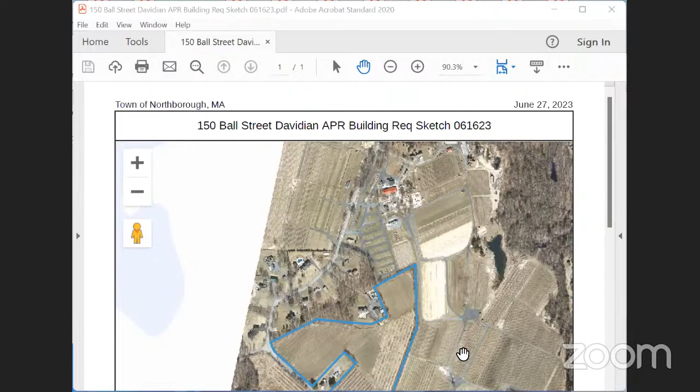Okay, there's a, Vinny's put up an aerial shot. Okay, so here we go. This is 150. How far down do I go? This is Ball Street coming in the corner, and it goes up to their operations here where they have a greenhouse located in this area. This picture was taken before the greenhouse was installed. But this is their operation there, and they're proposing to put it in the red square area, approximately the appropriate size, being 60 by 100.

And there's no wetlands. There's a little wetland down here, but the scale is 500 feet to the inch, so they're more than 500 feet away from any wetlands. And there's a stream down here, but it's not an issue at all. The property within the APR is highlighted in blue, or one of the Michael properties.

Davidian's raised his hand, I'm sorry, Vinny, Michael Davidian's raised his hand. I'm bringing Michael into the meeting also. Okay, sorry, go ahead. Yeah, so that's basically it. The blue area is one of the parcels. There's APR on the property to the south as well, but this is the one they're talking about, referenced in this request to build the packing facility there. So it's a building associated with an agricultural use, so it's allowed on an APR, agricultural preservation restriction. The commission holds the restriction, so they need permission from us before Department of Food and Ag will authorize the grant or a loan, whatever it might be.

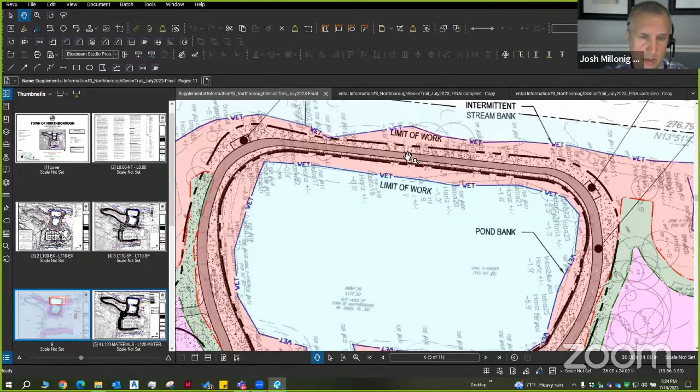I think that was a comment from the commission there. So we've reduced that down to 2 feet. And then also towards the left of this plan, Jeanette, where our stone dust pathway T intersections into the pavement path, we've pulled that out. It was creeping into the 35 foot buffer area. That was a comment that we addressed that came through the commission. So we were able to slide that south, we'll call it, and pull the path portion of that out of the buffer zone. So we're just into the wetland buffer zone there with a little bit of regrading and some revegetation that's kind of spilling into the 35 foot.

We've updated our plans here. We understood that there was some kind of confusion, they were a little hard to read with the various buffer zones here. So we just simplified it. We have kind of the red area that's from the wetland flag, that's your 25 foot no-build buffer. The green is your 35 foot buffer zone. And then the 100 foot wetland zone is all the magenta there. So hopefully this helps kind of clear up and helps to really visualize where we're doing a lot of our work there.

Another comment we addressed from the June meeting was to put slope indicators on our grading plan to indicate where we're pitching the water on the walking surfaces away from the resource areas. We have a couple slope indicators showing we're pitching those away at 1.5%. So any stormwater that falls onto the paved areas and pathway areas will be directed away from the wetland into the vegetation areas along either side and the shoulders, allowed to infiltrate naturally into the soils there.

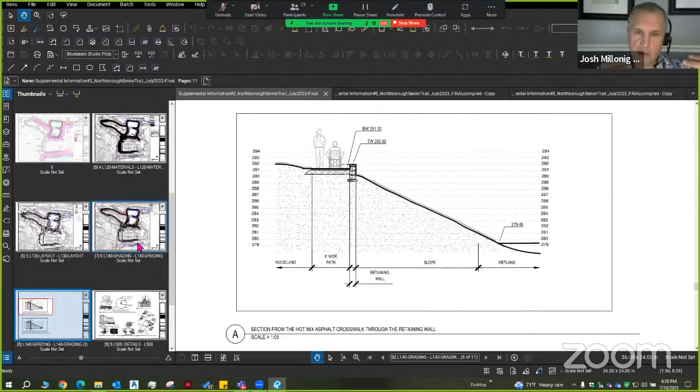We looked at this in more depth and cut a couple sections through there just to verify that our walls are the minimum amount needed to really minimize the amount of disturbance in this particular area. We looked at potentially pulling the wall and the walkway back towards the parking lot area, but we felt that doing so would start to clip out some of the existing natural forest there, which we feel is a good buffer between the parking lot areas and the wetland slopes, helping screen parking lot cars and any lights from spilling into the wetland resource areas. So for those reasons, we felt the current layout, wall heights, and slopes provide the most accessible pathway down while minimizing to the maximum extent possible the disturbance to the resource areas.

We can walk you through more of those questions. We did get another set of comments from Vinny about mid-afternoon last Thursday. Vinny, we've addressed those comments line by line and I sent you some documents late this afternoon. It sounds like you might have just received them or maybe haven't, but we're happy to walk through those if that would be preferred.

Yeah, no, like I said, I hadn't had a chance to review it, but I think your summary was very good. I think it made a good description of where we stand.

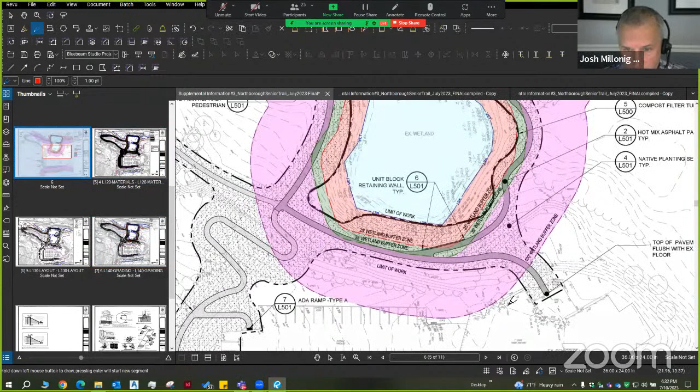How much encroachment are you doing right now in that area, inside the 25? We are regrading pretty close, about a foot or so away from the wetland flag line. We're meeting and matching the grades just outside, about a foot above where the wetland flag line is.

That's the area highlighted right now in the rectangle. Yes, you can see our limit of work line just kind of kisses just outside of the wet line, the WET line that's in blue. So that's our limit of work, that's our limit of grading. I don't know, Jeanette, if it makes sense to flip back to the grading plan just to show the extents. We're meeting and matching that. I'm not exactly sure what contour line it is, but that one that's right outside of the wet line.

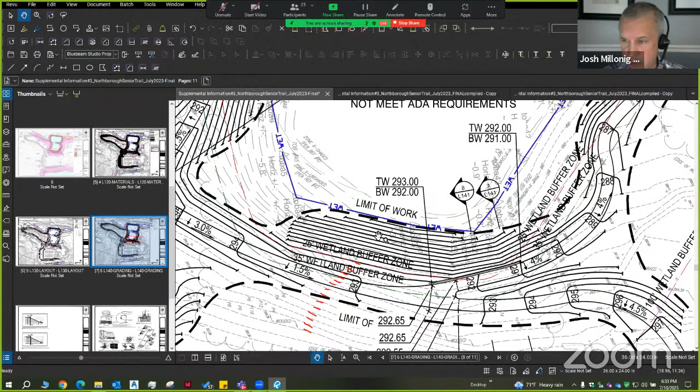So that's where we're meeting and matching existing grades. We're staying completely out of the wetland flag resource area. We're not proposing to do any work within there. All of our erosion sedimentation control is going to be outside of the flag line. We are doing this compost filter tube, which will remain in place in perpetuity. It's a seeded erosion control wattle, so that'll stay forever and provide some additional sedimentation mitigation ongoing, and also provide more planting to help.

Okay. Just a question, Vinny and folks from Weston Sampson - you're looking for a number of waivers, correct, from the bylaws? Do we have a listing of the waivers you're looking for and your mitigation plan for each one? That'd be a lot easier to figure out here.

Yeah, we do have the list of waivers. That was one of the comments, Vinny, that we were just buttoning up late this afternoon. That was part of the reason for our delay getting responses out to you, but we do have that list of waivers. It is in the latest response that we sent back to you this afternoon. It's an attachment - attachment C. If you wanted to scroll down to that, we provided more information, Vinny, that you requested that details a bit more reasons for support of this request and some more information. So this supplements the previous list that we included in the supplemental response number 1, I believe.

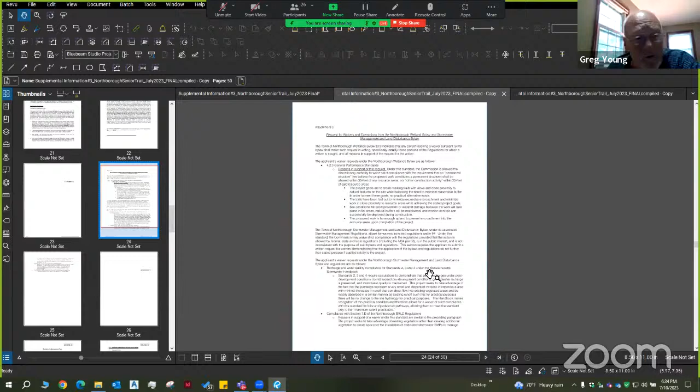How many waivers are you looking at for exceptions to, or are you looking for? Quite a few, I don't know if I've counted all of them. You're talking like 20, 15, 26, whatever. I would say more in the realm of 5, 10, 15 waivers. We have waivers for both the stormwater and land disturbance permit as well as your Northborough wetlands bylaw. So we have a list of waivers for both of those.

My 2 cents only, and I would ask for the commission's comments after I make my comments, and that is that receiving 15 waivers an hour and a half before the meeting is not really the way to do business, in my view. We need time to digest them, discuss them, and hopefully come to these meetings and work through it, not have this be a working session for 2 hours. My 2 cents says that we let Vinny go through that listing, work any gaps with you, so that when we talk about this, it can be a streamlined process as opposed to a long working session. Now, if the commission feels otherwise, fine, but I'd be interested in hearing comments.

I agree with you 100%, Greg. This seems - yeah, we haven't even had a chance to look at this, so.

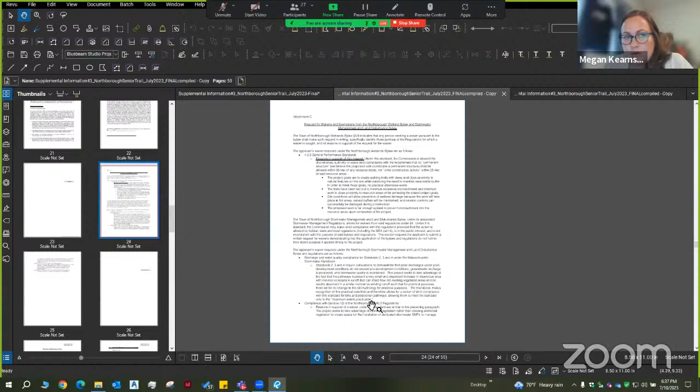Just want to make a note of that. Any other commissioner have comments on this? Do you want to move forward as it is, or do you want to look for a different approach?

I just have one question, Greg. On one of your plans, it showed a section of trail that was not ADA accessible. So I guess I'm curious, my understanding was to create an ADA accessible loop around the pond, but there's a section that's not.

Through the chair, the loop around the pond, correct me if I'm wrong Josh, is ADA accessible. The loop that goes up the hill toward the cell tower is not ADA accessible, there's no way that would be, that's far too steep. But the intent and goal was to have ADA accessibility around the pond and around the parking lot. So while we were talking about the single switchback that goes from the senior center rear patio and does a 180, if you look to the left of that, there's a substantial switchback there that maintains ADA accessibility. It's not what your plan says.

I'm sorry, Dan? It's not what the plan says. If you zoom in, you saw a section of trail that says this does not meet ADA requirements. That's the section that's highlighted right there. That is an 8%.

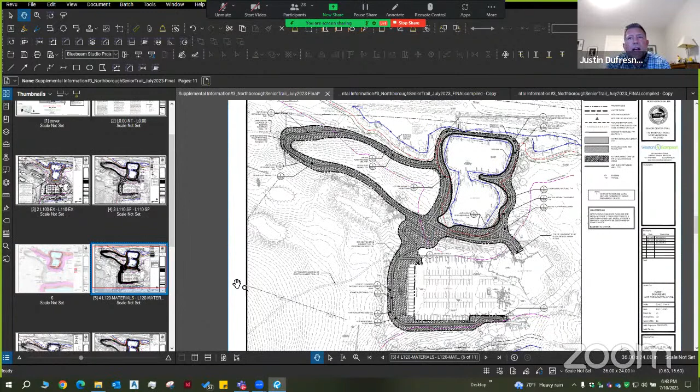Yeah, and I think my thought on that, I know it's kind of a small section. What was it, Josh? 7.5%. So that's kind of your typical handicap ramp accessible. It could be accessible if that had handrails and some kind of level landing areas, but I don't think we need that out here. At 7.5%, at least to me, we work on roads in Worcester and other things that are 16% and things, and people still navigate those.

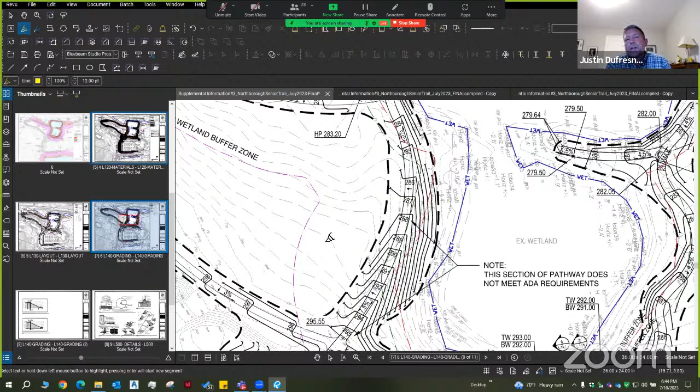I feel like having the hard surface there would be good for somebody pushing a baby stroller or something like that. They could still easily navigate that section. So to me, it kind of still feeds into the thought of this overall project. And if somebody really needs that flatter slope, they've got that longer walk they can get through. So in my eyes, I'm okay with it, and I kind of understand from an engineering standpoint, at least trying to get that in there to complete the loop around there.

Is there going to be signage that calls that out before you get to that spot? Yes, we have wayfinding signage around all the trail intersections, just to indicate what direction they're going, so that there's no confusion. There's going to be a lot of vegetation remaining, so when you're at that intersection, you may not be sure whether you take a right or go straight.

Okay, and then my other question, where we are doing work within the 25-foot, what's the existing vegetation there today? Is there any invasives or any of that taken out of there to revegetate that area, or is it just mostly some wetland vegetation that's kind of going back to what it was, or probably mostly upland vegetation? But is there anything invasive that we're getting out of there that kind of has a benefit?

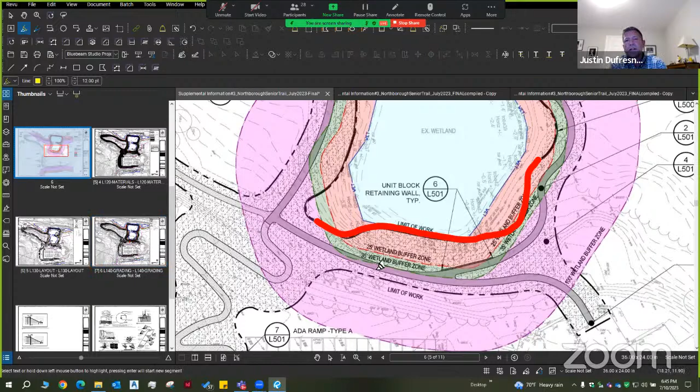So I don't recall there being very much invasive species out there. It was mostly nice wetland vegetation. It's a really beautiful wetland, so it'll be nice to be able to have the public go and walk around it and see some fish. I think I saw fish when I was out there last, so it's a really beautiful spot. I don't recall seeing any invasive species while I was out there.

So, which I think Megan, what are we doing with that slope for revegetation? Is it just getting a mix, or are we planting or plugging any plants along that new slope, or is it just we're going to armor it with some type of erosion control mat or something like that, and then it just getting some mix? Yep, I believe we're... correct. Yep, sorry, go ahead, Josh.

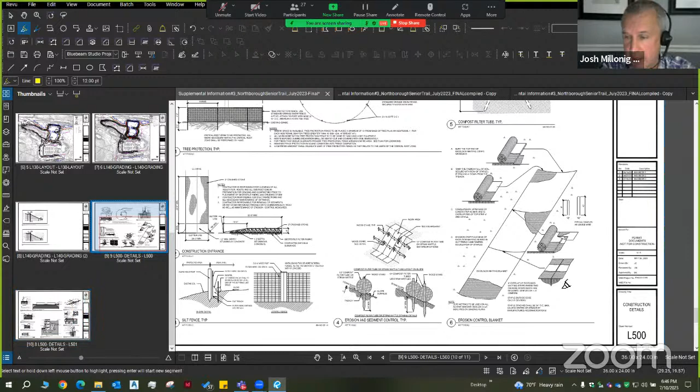Yeah, I was just going to say, our standard detail is slopes greater than 4:1 will get a jute mesh matting and erosion control blanket of some material that'll be staked down. We have some wattles that'll get installed at a periodic interval going down there. But the vegetation is a restoration seed mix that we're going to get from, you know, New England Wetland Plants or something similar, that's appropriate for this particular area. We want to get something that's going to germinate quickly and revegetate as fast as possible, but also provide some sort of wildlife habitat to birds and insects and things like that.

So it's strictly just a seed mix. We can get seed mixes that do have shrub components in them, so we can add that into them.

Just the native, this is kind of our typical detail there. We're going to have an amended loam, 6 inches, but we also want to scarify the subgrade to provide a good interface between the two, breaking up any potential compaction between the layers to allow more infiltration into the subsoils.

But any of these areas that are over 4:1 will receive an erosion control matting blanket. You good, Justin? I got to follow up on that, where you have the mat. You've got a materials sheet, and I didn't see anything called out on the materials sheet where that matting was going to go.

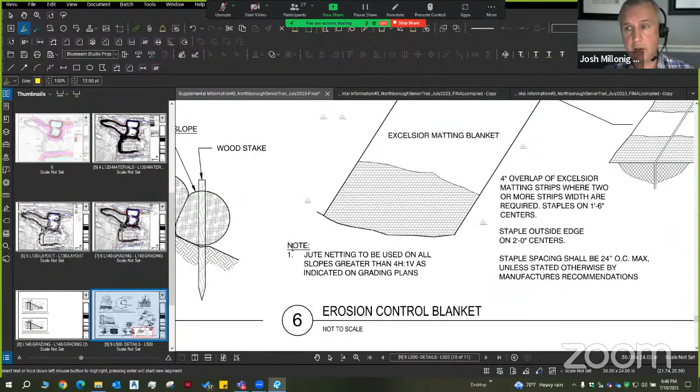That was one of the questions that I had. Yeah, we're relying on the detail to show all the places that are over a 4:1. We have it noted greater than 4:1. So it'll just be a coordination item that the contractor has to look at the grading plan and know where we have areas that are greater than 4:1, and he was required to put his erosion control matting on those areas.

Okay, so the materials plan doesn't reflect that? The materials plan does not reflect erosion control. That would, on our demo plan, our site prep plan, show the areas that we're removing vegetation from, but we don't call out where the matting's going to go. We do show where wattles go, or silt fence, or catch basin type protection, those type of things, which we don't have any catch basin or protection on here, but that's typically how plans are shown.

Okay, and you mentioned the silt fence. Where's the silt fence going to go? You have a detail for the silt fence and the wattle. Is that shown somewhere on the plans? Yes, because they weren't on the previous one. I'm just not sure where it would go.

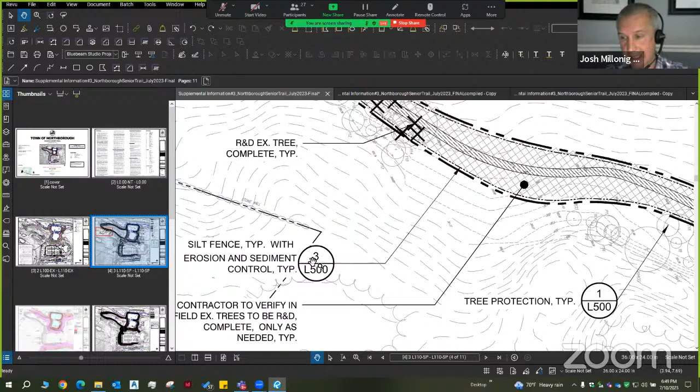Yeah, so previously we had the wrong call out there. We've adjusted the call out. It's going to point to detail 3 on L500, which is the wattle and the silt fence. So that is our kind of dash line.

And then we also have kind of a belts and suspenders situation happening around the wetland area, where we're going to have the 12-inch wattle that will remain, and then just uphill from that, we would have the sediment and wattle fence.

I believe that was one of the comments from our June meeting, was having a wattle with a silt fence is a good visual indicator if there's any excess erosion happening and it's starting to build up on the sediment fence. It's an easy visual thing the contractor can walk by and see. But on the downhill side, we would have another wattle that would remain after we pull the sediment fence out.

Okay, I just wasn't sure where that was shown on your plan, so as long as it's been clarified on the new plans, that's good. Yep. It should be shown. Okay, good.

Can we go back to the wall for a second? We talked about it earlier up here in front. Justin, last month, I remember you had some concerns about or suggestions about that wall.

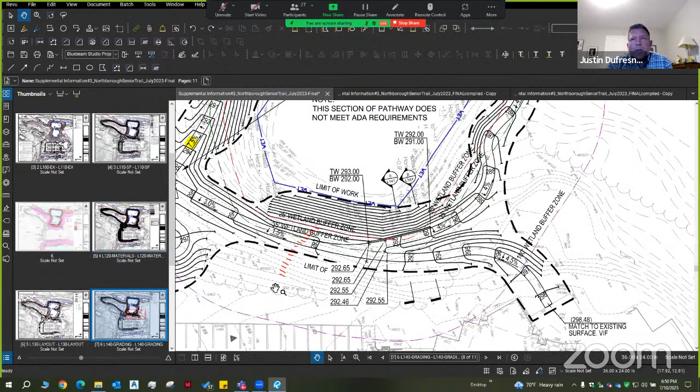Yeah, my thought was you might be able to extend the wall, maybe limit some of the grading. Also potentially pull the trail a little further away. I think Josh touched on that we'd end up probably removing some larger vegetation in there that we might not want to, and I remember that maybe from the last meeting where we talked about trying to pull it away. I'm looking at the aerial right now, there's a good amount of trees in there. So it looks like the further we pull it away, the more we're going to start to impact those, which I don't think we really want to do.

Yeah, my only other thought with the wall is maybe it gets a little higher, maybe that saves you from having to grade all the way down the slope to the edge of the wetland. But it seems like maybe you folks looked at that already and it doesn't save you much as far as the grading goes, and you have to dig down to put the foundations for the wall in. So once you start doing that, are we really saving anything? Maybe not. And then we kind of have more of a fall hazard or something too once that wall starts to get a little tall.

So, talking through it and looking through it, I think we've got a pretty good approach here. The biggest thing is making sure some of that vegetation really takes. It's going to be a pretty steep slope heading down towards that wetland, so we need stuff in there that grows quickly. Making sure that jute netting stays in place and does its job will be the thing to keep an eye on.

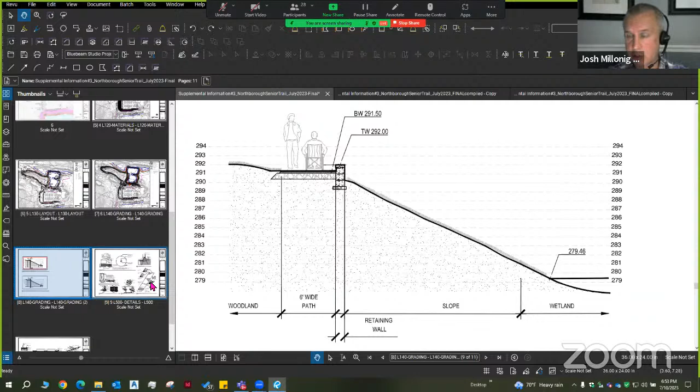When I looked at this plan on the screen, this section, I didn't see a line. What's the existing grade look like out there? Is it just not shown somewhere? The idea of what Justin was asking was about the downside of that wall, making the wall a little higher so you don't have to grade all the way down to that number, 279.4, so hopefully you could catch the existing grade before that. I can't tell what you need or what you can do without having the existing grade shown on the cross section.

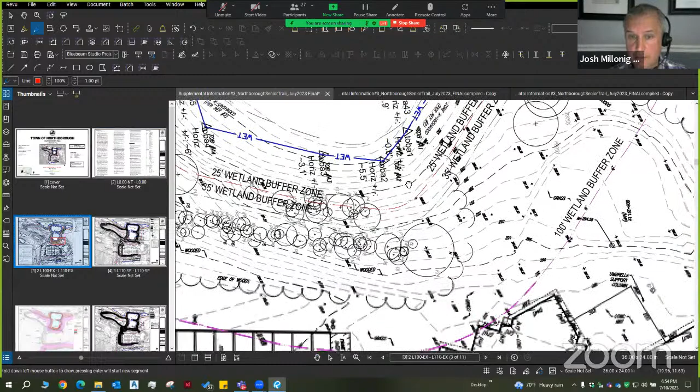Yes, we did not put the existing topography on there, noted. But currently it's a steep slope to begin with. It measures out around 3-to-1, getting a little steeper than that. I'd have to double check the actual grades, but right now it is a fairly steep slope to begin with. You can see it in the existing conditions plan here.

We do have some trees noted on there. There's a lot of trees down slope as well as up slope, so it's not a lose-trees-or-not situation. But the other thing is you've got a steep slope running almost parallel to your slope coming off that proposed wall, so that if you could make the wall a little higher, you would be able to catch it a little sooner and not be right down to the edge of the wetland. So that was the question: why wouldn't you make that wall a little higher?

Is there an ADA reason, was the question that came up last time? I wasn't sure. As far as ADA, we touched on the height differential and getting a 4.5% slope down in there. The math works out to a certain amount of run. So for this area where the wall is, we did take a look at if we extended the wall, made it taller, and pushed the slope on the bottom side of the wall down more.

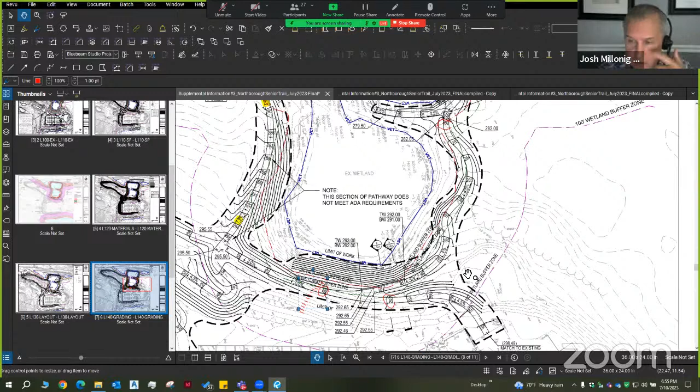How much would that save us? Once you start getting fall differentials higher than 30 inches, you're required to have a guardrail or handrail in there. If we're starting to get a bigger wall, putting handrails down with 4-foot deep footings to meet the load requirements on those handrails and guardrails becomes a larger disturbance in this particular area. So for those reasons, keeping the wall as low as we possibly can is the better overall solution for this area, since we're so close to the wetland.

We want to keep our slope from the wall to the wetlands as low as possible. Right now we're averaging around a 2-to-1 slope. If we decided to raise the wall to 30 inches, that's a 2.5-foot drop. If you take that extra foot we lower the bottom of the wall to and extrapolate that over the whole run, you don't really gain much. You're not going to be able to catch the existing grade 5 feet from the wall or 8 feet up from the edge of the wetland. You're really still going to need to regrade that slope almost to where we're currently showing.

Those are the things that I was hoping you'd analyze. So if you've done that, that's good. And we have, so, yes.

You don't need a railing when you've got a 2-to-1 slope off the back, as long as it's not more than 30 inches. Correct, we don't need a railing there. We're keeping the wall as low as we can. The wall is one of these Versa-Lok block walls that you can just hand install, so that's a lower disturbance type of material that we're proposing here.

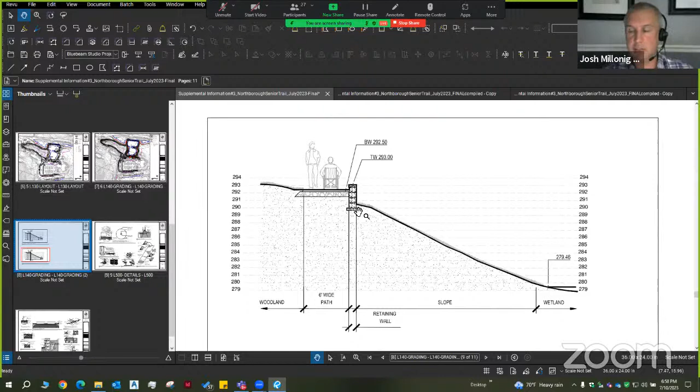But yes, Vinny, we do not need a handrail or guardrail here. We don't need a handrail because it's not steep enough to require one, and the drop is not high enough to warrant a guardrail to prevent falls.

Josh, how tall is the wall going down? Is it 1.5 feet, am I reading that right? This particular one... I can't tell, Jeanette, you're too close. The bottom of wall is just under 291, call it 290.5, and the top of wall up at the top where you're walking is at 292.

So you're around a 2-foot drop right at that particular area, and again this is the most severe point of the wall. As that walkway goes downhill, the wall and that height differential will get lower and lower.

Second question I have is on the far side of that second pond, where the existing path is very, very close to the wetland. I think you've shrunken the width down from 6 to 4 feet. Correct.

What about mitigation for runoff, trying to avoid it going into the pond, especially on the side facing the pond? On that particular area we skinnied this down. We do want to pitch water, so we're going to crown the pavement there, sending water to the left and to the right. We're going to have a wide shoulder, and it's fairly flat in this particular area.

We're not proposing major grade changes, we're really trying to follow the existing topography as much as we can. We just need to excavate to get the base and pavement section in there. But we're intending that water will just flow off to the sides and slowly infiltrate into the shoulder and the vegetation on either side, as it currently kind of happens now. Just trying to meet and match the existing conditions there.

A 4-foot wide pathway is the minimum ADA requirement width to get people between these 2 points. We have 2 turnaround areas with benches on the shoulders, some seating areas, which will meet the turnaround requirements for an ADA path with a 5-foot diameter circle. So if somebody in a wheelchair goes counterclockwise around the path, they have a spot to turn around and walk back the way they came. So we were able to skinny that down.

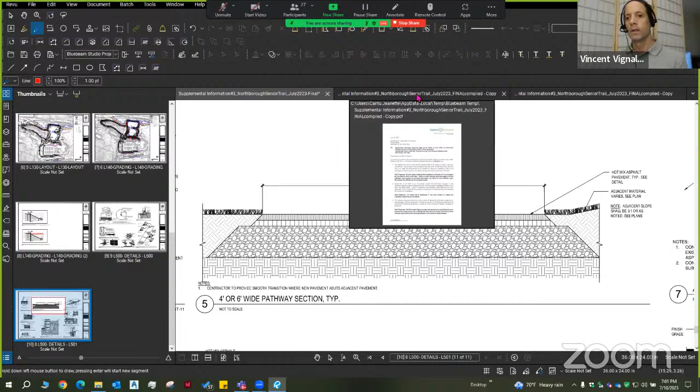I'm not sure what questions have been answered, so it might be more of a waste of time of the commission. The big questions are just the idea of the location of the paths, how much grading, and I think it sounds like the commission is okay with that. We just need to work out the details.

My concerns were more the idea of during construction, how are we going to have temporary sediment controls? I didn't see anything with that. And the other thing was they proposed the new grading, and I saw that, but I had a question that didn't seem to get addressed in the first couple of answers in the response that I read this afternoon. I didn't get all the way through it, but if you want to pull up the map of the trails and the grading plan, the biggest concern I had was the way you have the water grading off the trail.

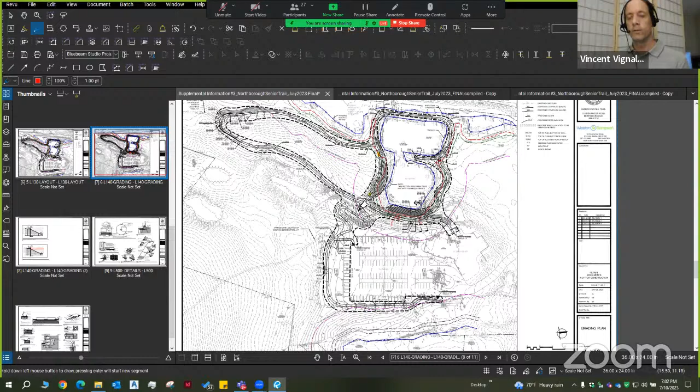It's going into that loop off to the south side on the left in the picture. You've got the grading shown from the pathway to be graded in towards the middle, so it's away from the wetlands, which is generally the thing that we would want to see. But what that does is it directs it all down to the low point. I'm expecting at the very low point there, down near the wetlands, you're going to have a lot of water being directed down. I assume there's going to be some kind of channel along that pathway because it's multiple 100 feet of flow. How are you going to address that crossing at the low point there?

And also right at the 4-way intersection, you've got flow coming in from the left in the picture, coming down into that. My fear is that during construction, it's going to come down here and then into that steeply sloped section. So like you said, it's an 8% slope, if not greater currently. It's going to scour everything out and go right down into that wetland or into the pond. So that's the areas I'm really concerned with, not so much like on the right side where you're just sending it off into the duff layer. That's a good plan.

Yeah, I think for the most part, like I said, we have the erosion control matting on everything that's over a 4:1 slope. So most of this site, most of this area around the wetland pond, is going to have the matting. And then around the wetland pond, we do have that double layer—we have the 12-inch wattle that will stay, and then upstream from that we have the wattle and sediment fence. So you kind of have 3 layers of erosion control barriers between any disturbance happening uphill before it even gets a chance to reach the wetland area.

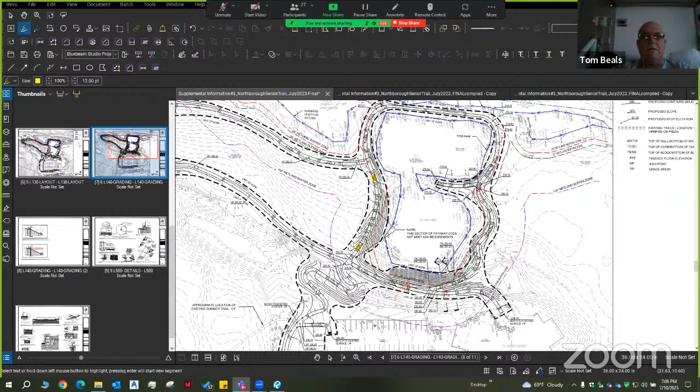I have a suggestion. Hello, Tom Beals. Yeah, just for general rain control during construction, regular hay bales could be stuck in, if you're going to have an overnight rain event or what have you—standard, we don't have to go to straw bales or anything like that. If there's 25 or 30 standard hay bales that can be staked in, every 6 or 8 feet, on those slopes, just to control the water flow and not have a washout, I think that would be appropriate. Yeah, it's not impossible, it's just that it's not proposed yet. That's all I'm saying.

Is the commission looking for this proposal to be shown on drawings?

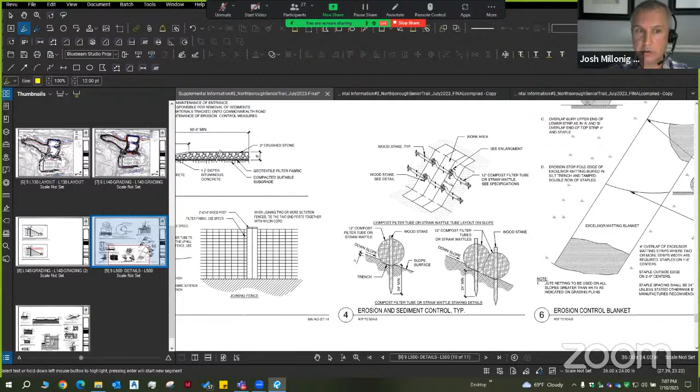In past experiences, particular items like this that are more field-related, as things arise, it's typically handled on site as needed, where the contractor knows this particular area is prone to washing out. We're concentrating water right here. We'll typically talk with the contractor as they're building to do temporary solutions. I like the straw bale idea, or extra wattles. They keep extra wattles on site all the time. It's required, it's in our spec, in case something happens like a blowout, so they have extra material to immediately address any erosion.

But typically what I've seen in past projects is these particular areas, when they happen and we find out during construction, we can armor particular areas as needed. But it's kind of hard to show them on drawings at this point, when things could potentially move or phasing might change. So I would like to address it, I'm just trying to figure out the best way to do that. Our stance is we have standard erosion control details that outline where the contractor is responsible, but also he's responsible for maintaining the site and preventing erosion as a blanket statement throughout the site. It's his responsibility to maintain the site.

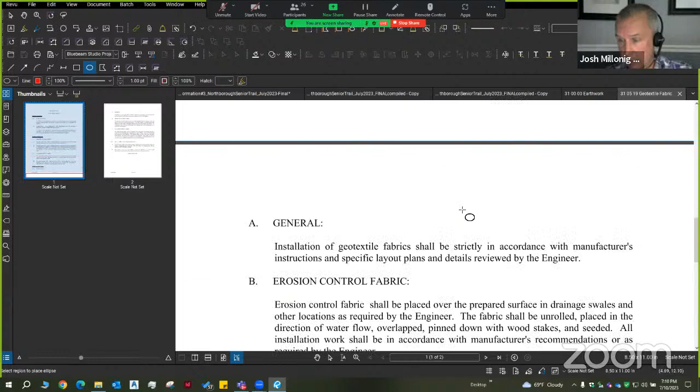We have environmental protection, erosion control, documentation that the contractor needs to follow and follow up with. It includes contacting the commission. I'd imagine part of your standard boilerplate order of conditions that the commission sends out, you're going to want to see where the erosion control will be installed, limits of grading, limits of work, trees that may or may not be cut down. There's a whole list of things that will happen and documents provided to the commission prior to the contractor even getting a shovel into the ground. So we have all of those. They're not required by the commission to provide, but we are working through those, and that's just part of the bidding process.

I hope that answers that in a nutshell, Tom. Thank you, Josh. Thank you, Josh.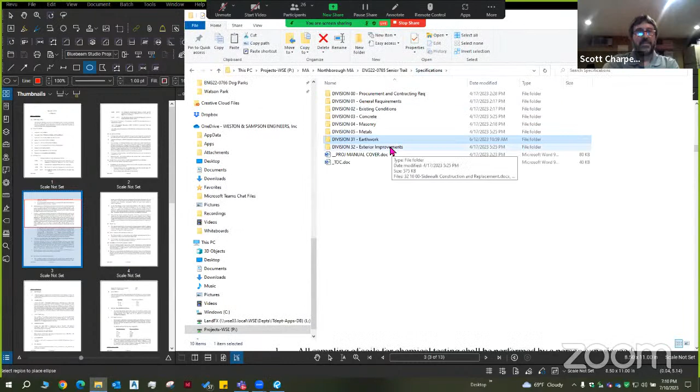Who's going to manage the contractor? You guys, or is that done by another party?

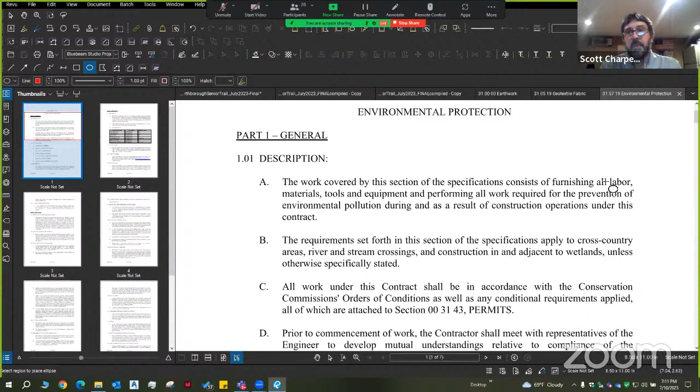The construction project will be publicly bid out by us, the Town of Northborough. We have engaged Weston and Sampson as our construction site representatives. They'll be out there periodically doing inspections, as I will be. I know Vinny will be popping by, and I believe we're going to have a couple dozen up to 100 seniors out there looking out at the parking lot constantly at the construction project. But Weston and Sampson is responsible for submittal reviews, construction observation oversight, reporting, and pay requisition reviews. So there's a lot of eyes on this project.

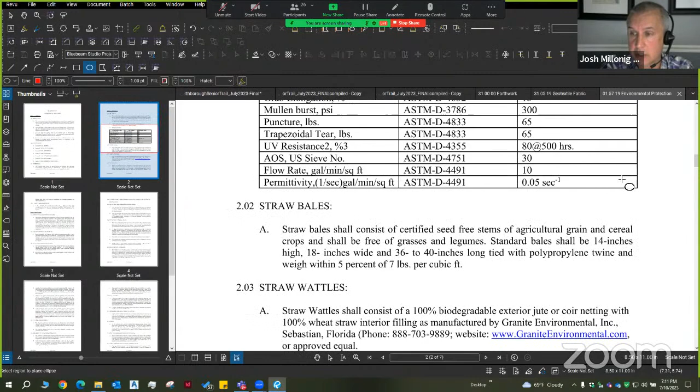Yep, correct, thanks Scott. All the submittals will come through me. I will review them, compare them to the specifications we are writing, and compare any work that's phased in their work plan. We'll see how that matches up with the order of conditions and any other specific items the commission wants to put into that. So yes, Weston and Sampson will be on site. There will be regularly scheduled meetings on site, virtual. So like Scott said, we're involved, we're around, we're reviewing, and we're looking at everything.

Vinny, how are you feeling about this?

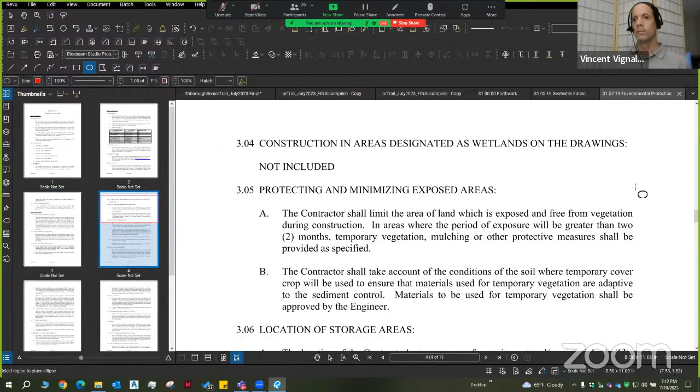It sounds like he's doing work and he's gotten some stuff completed. I just don't know what's completed enough, or if the commission is okay with what they're submitting. I haven't seen the revised plans. They're going to come soon, I think. I got a response to comments letter, and got kind of halfway through a 50-page document, but didn't quite make it. So I think we can work through anything.

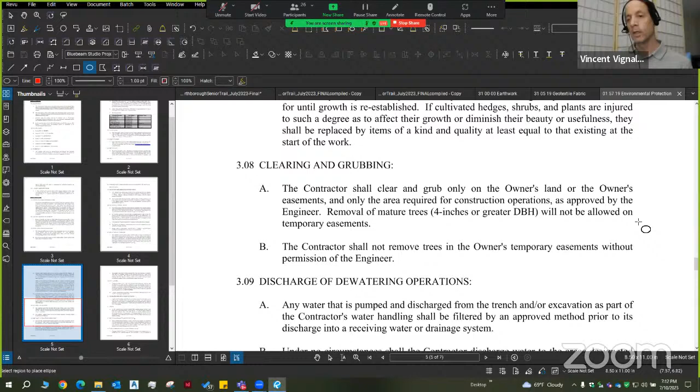I don't see any major issues besides the drainage and how to deal with that flow when it rains. Because what the comment was is when the contractor's out there, he sees where problems arise. I want to try to get it before that situation occurs, so that I don't have to deal with wetlands that are impacted or the pond that's slushy or sludgy. But it's up to the commission on how they want to proceed.

My personal feeling is that there are questions to be answered still. We received a big document late in the day of the meeting that hasn't been reviewed yet. We need an updated plan, and the answers we're getting are, well, we'll deal with it on site, we'll deal with it when it comes up, which doesn't sit well with me based on previous experiences with contractors in the town of Northborough. That's my own personal view. Was there a problem on one of the past public works projects, Mr. Chairman?

One of the challenges we have on public procurement is that there's a line somewhere between tying a contractor's hands too much and costing undue expenses to the residents, and giving them way too much rope. So what Vinny said is a hill washes out into the wetland. And I think, correct me if I'm wrong, that's where we're trying to identify where that line lays.

Correct. All right, any questions from, let me see if we got any public comments here. Do we have any? I guess last one from me too. Go ahead, quick, Justin.

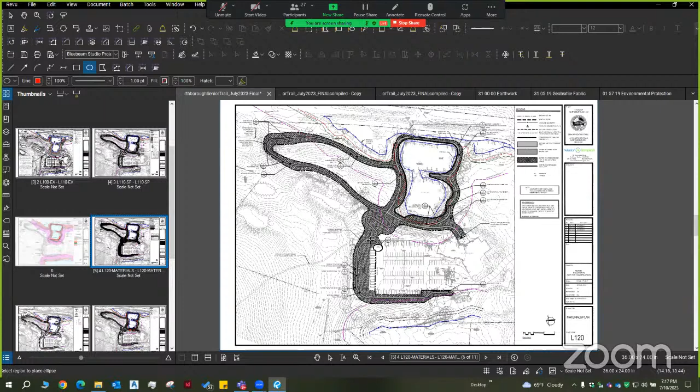The other concern I have is that we designed to ADA standards, which are a civil rights law that is not enforced by the building officials in Massachusetts. We have to conform to the Architectural Access Board guidelines, which is 521 CMR, and not all of the ADA guidelines and the AAB guidelines are consistent with each other. One of which is ADA ramp widths are 3 feet wide and AAB are 4 feet wide. So if the board were to consider widening the sidewalk to 4 feet and put guardrails, then that section would be fully compliant with both the AAB and the ADA. So that's all I have to say. Thank you very much.

Any responses to Mr. Reardon?

I agree, he's correct. It's non-compliant with AAB based on the lack of handrails, not the slope. Up to 8.3% is allowed as a ramp, which is over the 5%. So Tom's accurate for sure.

Yes, I agree, there are certain landings, just to expand upon that. Every 30 feet you need a level landing, so it's more involved than just adding handrails along this section. We'd have to look at the lengths and runs and provide level landing areas, which would flatten out certain areas and potentially increase the disturbance, just to provide wider areas. The handrails themselves need 4-foot deep footings for the lateral forces required for foundations, so again it's more disturbance happening in this area versus paving an asphalt walkway.

But Tom is correct. Are any of the items Tom brought up a risk to funding or to the use of the ADA compliant terminology? We absolutely cannot afford handrails on, what is that, an over 100-foot length of walkway. Handrails are 150 a linear foot on either side, so 300 a foot. There's absolutely no way the project could handle that. Correct, yes.

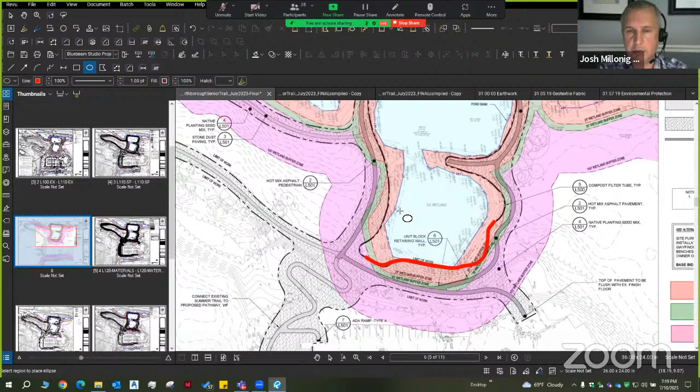The trail layout system is ADA compliant. If we have that sign right at that T intersection that says from here on is not compliant, or the ADA path goes this way, we have a directional arrow to show where places are. It is a full looping system, or you can get to a place and have an opportunity to turn around and go back the way you came. So I don't expect this to have an issue with funding. It meets the MAAB requirements for accessibility.

Thanks, Josh. Okay, any more questions, comments by the commission?

In general, I think Todd brought up earlier too, this is a good project that I think the commission certainly supports, certainly supports the concept of it. I think our concerns are around, obviously what the commission exists for, minimizing any threats into the resource areas there. It's a very sensitive area, a place where it's hard to work around. There's not some easy bailouts. And I'd like to see it move ahead, I just want to make sure we're moving ahead with eyes wide open on that one.

Any last comments, Vinny? You're muted. Nothing new. Okay.

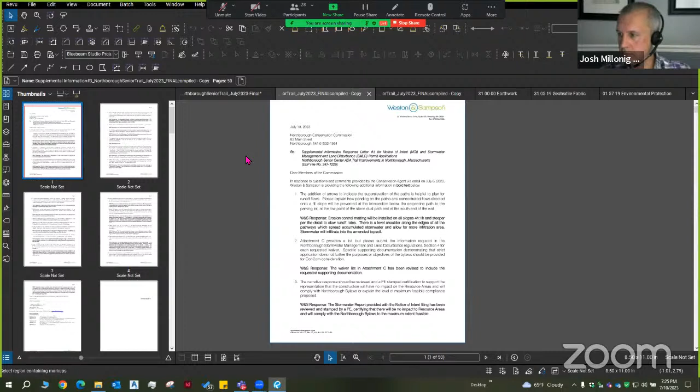I move that we move the meeting to August and continue, straighten out all these entanglements. Second, that's seconded by - was that Justin? It was Todd. A lot of people throwing voices today.

Okay, voting to continue the meeting to August 14th. Roll call vote: Dan Clark, yes. Justin Dufresne, yes. Diane Guldner, yes. Todd Helwig, yes. Tom Beals, yes. Greg, yes.

Just to jump in, members, are you pretty sure you're going to be able to make it for the August 14th? No vacation issues? I'll be there. Wouldn't miss it. All right, as long as we got a quorum, that's what we're looking for.

All right, so August 14th - I would certainly hope that's the last meeting, get this thing wrapped up and move ahead. It's a good project. We'll make sure we have no loose ends. Thank you, Mr. Chairman, thank you Commission. Thank you Scott, thanks folks. Thank you, thank you.

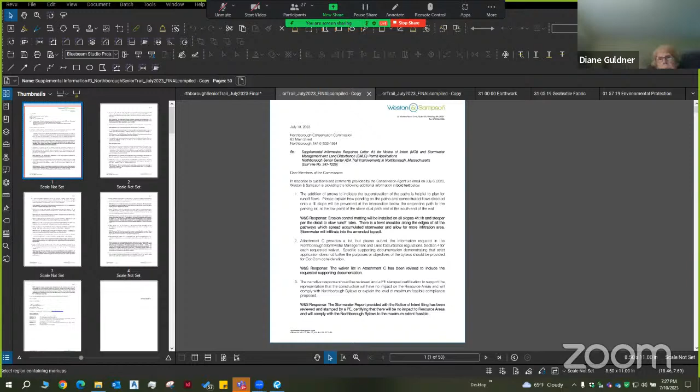Clean up. All right.

Continued - 78, I'm sorry, 311 Crawford Street. That's being continued, Vinny, correct? Yes, I got an email this afternoon and they requested a continuance.

I visited a couple of the abutters today on that, the ones across the street from the existing driveway. They have no history of water into their property right now, FYI. Okay, all right, I think we're at 78 West Main Street then, correct?

Nope, we have to - yes, motion to continue the public hearing. Thank you, thank you, motion - we need a motion to continue 311 Crawford Street. So moved. Second, by Tom Beals.

Roll call: Tom Beals, yes. Dan Clark, yes. Justin Dufresne, yes. Diane Guldner, yes. Todd Helwig, yes. 311 is continued.

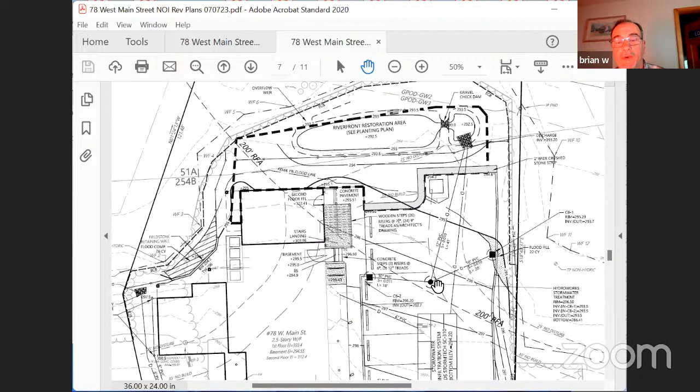So now you can see we've added a second deep sump-hooded catch basin off to the left. That goes into the Barracuda HydroWorks stormwater treatment unit, so both catch basins would go into there, and then the overflow goes down to that riprap splash pad.

And we've also increased the 2-foot wide stone strip and extended that along the entire edge of the pavement. That's 2 foot wide, 2 foot deep with a filter fabric.

And we've updated the stormwater management report, which was sent to Vinny. Obviously he hasn't had time to review that extensive document yet. The stormwater infiltration system in the middle of the parking lot was rotated so that it's completely out of the 50-foot, or that's the 35 - I think part of that's still in the 50. We'll have to slide it. I thought that was done, but I guess we'll have to slide that farther up.

Even though we're meeting the separation to groundwater, we did run a groundwater mounding analysis attached in the stormwater report showing we're not impacting the groundwater. So we'll have to slide that system up a little more to make the 50 feet. I thought that was in today's plan, but I guess not, so I'm sorry about that. That's a 35, not 35, yeah. We'll get that adjusted.

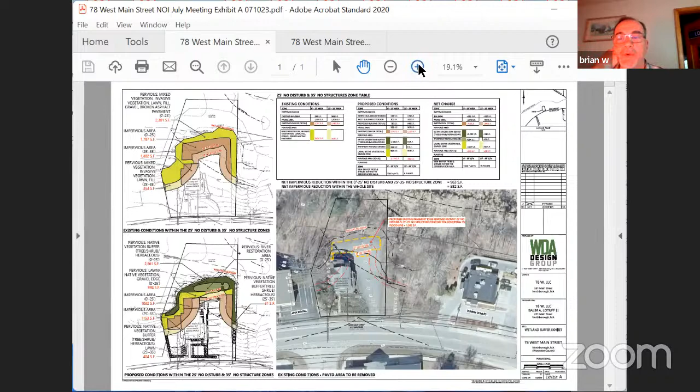Vinny, do you have the graph, exhibit A that we sent today? I do. So Vincent had requested kind of a breakdown of the disturbed 25 and 35 that's existing now.

Can you just scroll down to the aerial exhibit part? So you can see the existing pavement runs down very, like I said, within 4 feet of the wetland flag, between 4 and 5 off to the northwest corner, and generally anywhere from 6 to 12 at the maximum.

So that pavement is what's coming out, what's outlined in yellow is to be removed from the site, and that is the majority. You can see the 25 no disturb and 35 no structure - it's already historically been altered. The original house was built in 1900; I'm not sure when all the pavement extended down to that area, but at least in the 60s and 70s. So you can see the existing house takes up most of the 25 and 35, and that area of pavement is to be removed.

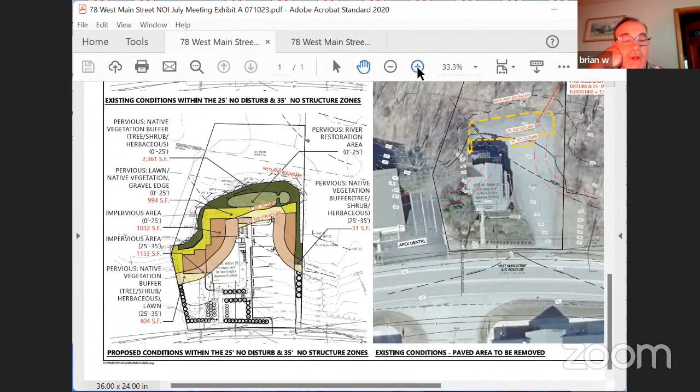The building - can you scroll out just a little bit, Vincent? Off to the left here, this gives us the square footage. The bottom one shows the proposed conditions, so you can see the building addition - that's the westerly building addition to the north. That's going into an area which doesn't have pavement now, but is historically disturbed with fill and an old cesspool. The north building addition is actually extended into what is pavement now.

And then the yellow and green is areas that were revegetating upon removal of the pavement. So we would be restoring the majority of the 25 to 35 foot no disturb in that area.

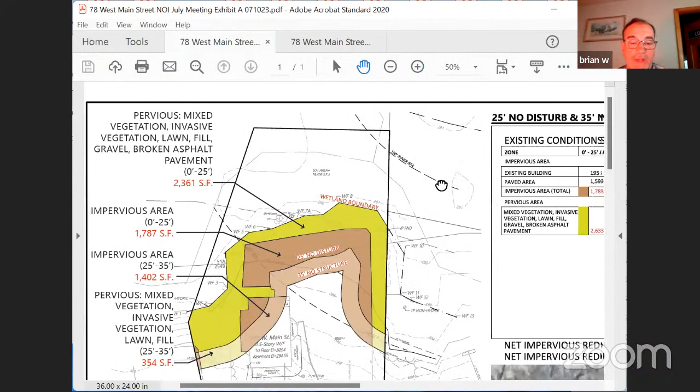And then if you zoom all the way out, we broke down in a table up there, as you had requested, the difference between the existing disturbed site, which you can see is pretty clear in that left hand view, how much of the site is really disturbed now. And I know you've been out there, I think Chairman Young, and Diane, I believe so.

So we do have the proposed addition in the north falling within an area that's already paved now. The westerly building, yes, it does extend. The closest corner is, I believe, 11 feet from the wetland flag too. If you go down to the bottom one, you might be able to see it in there. We can do it on the design plan. Yeah, right there.

The north building is no closer than existing now. So the waiver we had asked for is, the majority of the work in the 25 and 35 is actually to remove pavement and restore things. So it's not an impact, it's an improvement. The one area is the corner of that building that is within the 25 to 35, but it's an extension. I believe Tom Reardon is the architect, I don't know if he's still in attendance, but part of this was given the historic nature of the building and meeting roof lines, and making an addition work to get families in here. I think that's part of why it's extended as it is, but it would still be a minimum of, I think, 10 or 11 feet from the wetland.

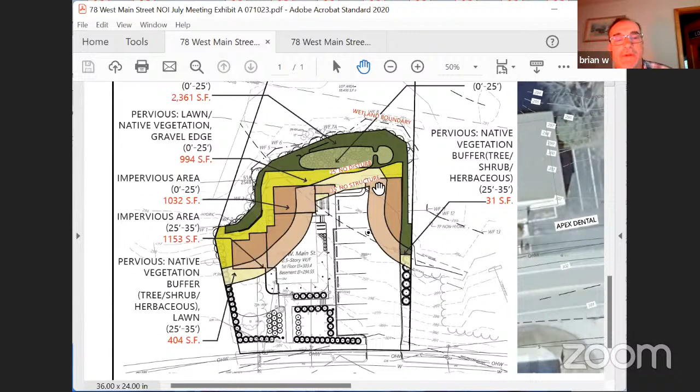And we'd be adding - can you go back to the planting plan for one second, please, Vincent, if you still have that open? It was one of the earlier ones, right there. Yep. So you can see where the building addition corner is. We're adding, right off of that, new and additional shrub and tree plantings.

Additionally, this area between the wetland and the pavement and the back of the building has numerous invasive species. I know Vincent made a comment, can we move the erosion control barrier farther from the wetland? Part of the reason for keeping it that close is we want to be able to access that strip of invasives between the pavement, the lawn, and the wetland to remove them and then get these new native plantings put in. We have no direct impact to the wetland. It is close, but we kind of need to work that close to get rid of the invasives and then replant.

So you'll be increasing a denser wooded shrub buffer directly adjacent to the wetland. And then the area between the former rain garden gets the conservation seed mix and then also the plantings as specified. And these are species that are tolerable of periodic inundation and will also provide a filtering effect before any discharge of stormwater.

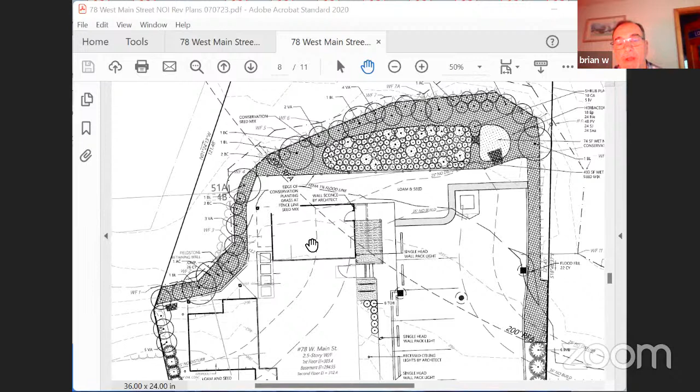Overall, we're removing 1,600 square feet of pavement. But with adding some new pavement up towards the outer edge of the driveway, at the very top, that expands. That area is actually the buffer zone—the entire site's in the buffer zone. So the net reduction overall is 963 square feet of impervious surface. If you add in the building addition and the upper parking area, the net reduction is still 582 square feet of impervious on the entire site.

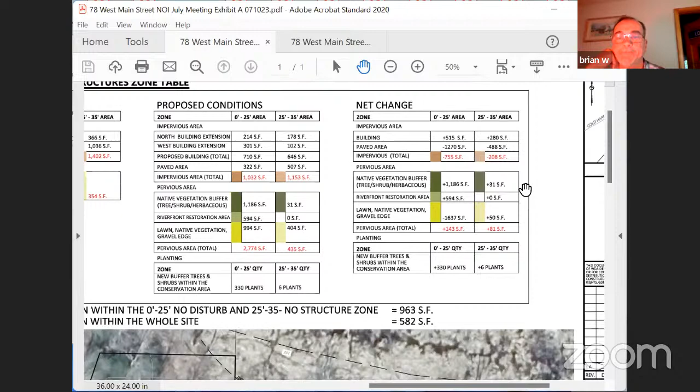Is that on the exhibit that you gave me? Yes, that's on that exhibit, up in the table, fully explained. And it's further outlined in our reply letter. Like I said, you can see that the majority of the 25 to 35 foot buffer gets restored.

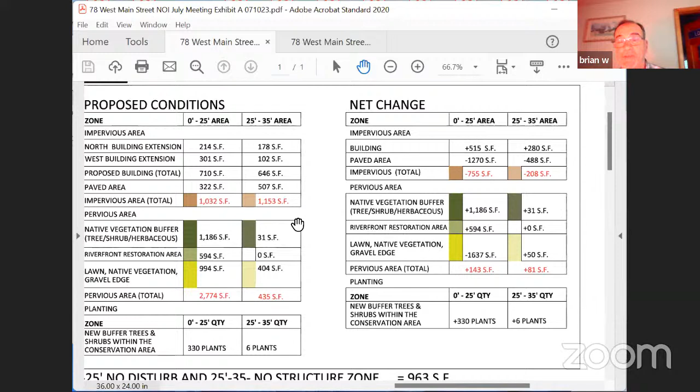We get rid of the pavement. We're adding infiltration for the entire roof, that's the old roof and the new roof, where you currently have no stormwater controls on the site at all. Everything's just sheet flow down the hill right towards the wetland. So the net benefit of infiltrating and restoring the buffer is what we're asking for—a waiver to allow that one addition.

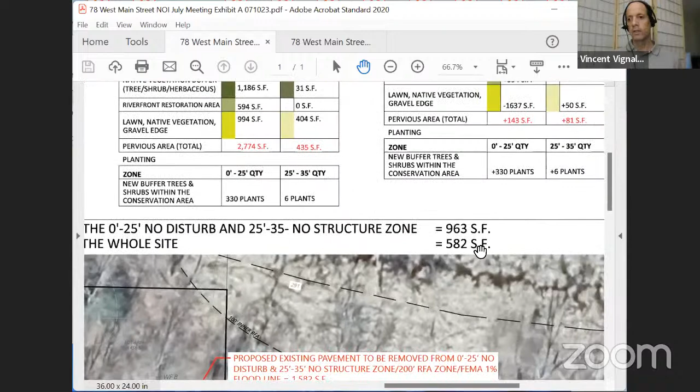Vinny, on that exhibit, right at the bottom it says in bigger letters, 963 square feet. What is that number? It says net impervious reduction within the 0 to 25 and 25 to 35 foot zones is 963, while net impervious reduction within the whole site is 582, as was said before.

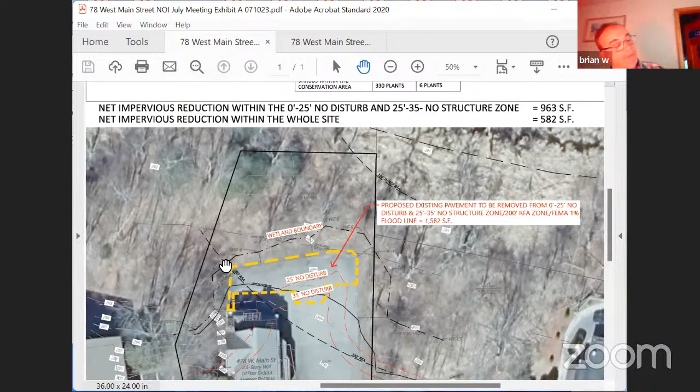My other quick question: what invasives are in that area you're trying to get rid of, and how are you going to remove them? Garlic mustard, Asiatic bittersweet, reed canary grass—I think there were six of them—and multiflora rose.

How are you getting rid of them? They'll be cut and pulled. Most of that stuff can be cut and pulled, the garlic mustard included. If they need to do a spray, they'd have to go through a licensed applicator and follow up with you. Then you'll be placing new soil and new vegetation to outcompete them.

Hopefully. The bittersweet is growing up some of the trees and has killed some of them, but they're either in the wetland or off our property, so we have no control over some of it. We're going to do the best we can on the stuff we can reach on site, between the wetland and our work area.

Unfortunately the bittersweet is climbing in the trees between the Dunkin' Donuts side, the back side of the site, up into the tree you can see in the aerial photo above wetland flag 8—right above that area there's some bittersweet up in those trees, and a couple of them are already dead.

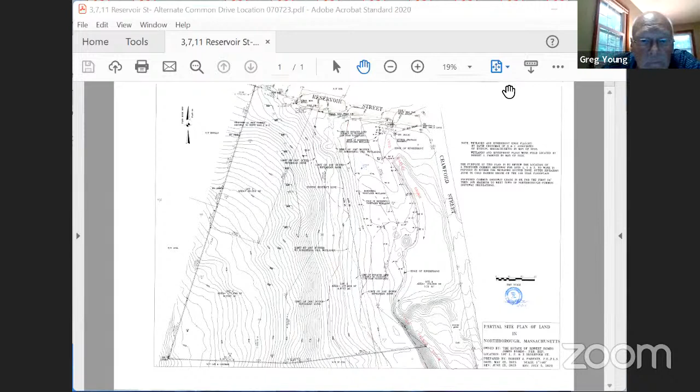And Vin, can you pull that plan up? I am getting there. Okay, thank you, I was making sure I didn't have to. Oh, Vinny's an expert at this stuff now. Yep, I know, it's kind of scary. Right, that's it. Can we make that a little bit bigger, get a little closer maybe? I can, I'm having trouble with the Zoom - the Zoom screen is kind of impacting my access to zoom in. There it goes.

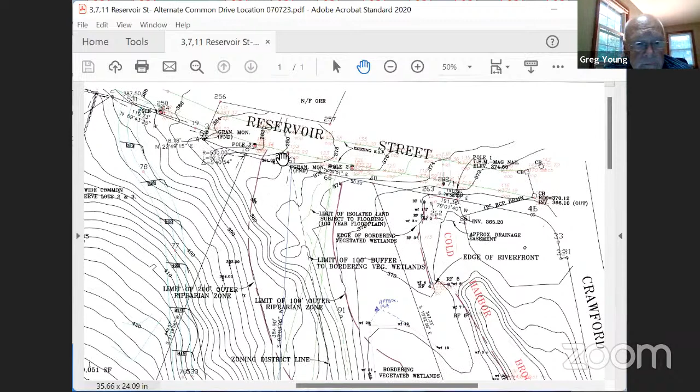All right, so the property corner is right in here, in Reservoir Street. Correct. So there's a stone wall on the west side of the property. And originally I submitted a plan that showed a proposed driveway on lot 2, which is right about where Vinny has the cursor there. So the original plan showed a little bit of disturbance in the riverfront area, which is why I wanted to get the wetlands flagged and have the commission look at it.

But I met about two weeks ago with Vinny, and before Fred left, Fred and Laurie. And Fred asked me to try to present a driveway for the 3 lots together, which it might be more economical anyhow, but it's also going to allow me to create an area where I can recharge some of the stormwater, right where Vin has the cursor there.

So there's a natural low area there, about 2 feet lower than Reservoir Street. So once I get the common driveway designed, now that I've shown the commission this plan, I'm confident we won't have to work in either area, the riverfront or the wetlands area. I'm going to try to do some soil testing out in August to get updated perk tests. I guess the Romeos had perked this land unofficially years ago, but I don't have a record of it, and the current Board of Health has never been on the site.

So we will be trying to find the best spots to perk the land, probably just to the north of the Lot 1 labeling, right here. The house is probably going to go in that area, as that's the flattest area. And then on Lot 2, the house will go further back.

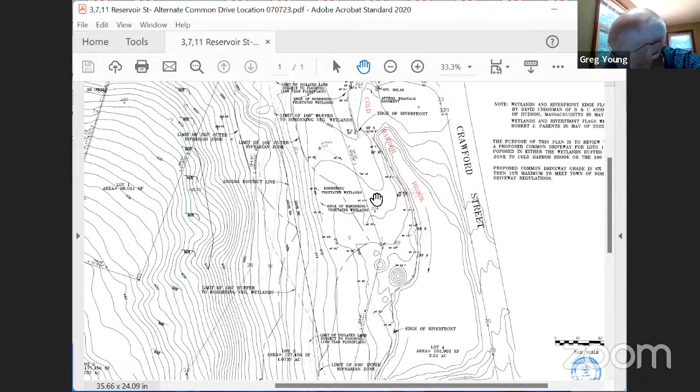I've got Clint Walton. Mr. Walton, you can speak please. This is Clint Walton of 33 Reservoir Street. I was just wondering what the protocol is on notifications. I didn't receive any notification on this until about 20 minutes ago from another neighbor. I just want to make sure I'm on the list for any information going forward.

The notification requirement is for any abutters within 100 feet, so I'm not sure that 33 is within 100 feet of the corner here that I'm pointing to.

He had the certified list of abutters submitted to the assessor's office, and it appeared that he made notice to all the people who were noted and required to be noticed. So you might just be 101 feet away, which would pull you out. Okay, I didn't realize it was that little of a distance. I'm probably close to 100, but yeah, probably over.

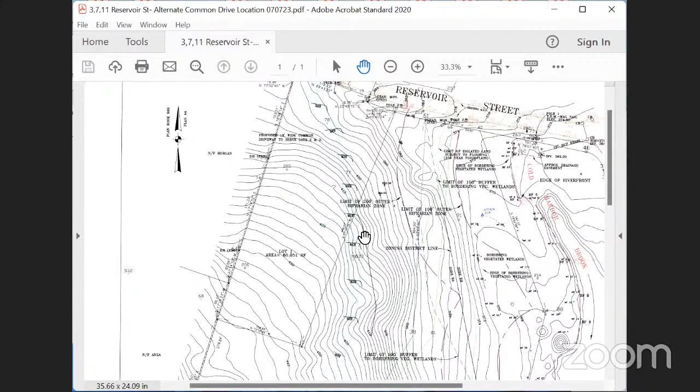I'm all about everybody making money and doing what they want with property they own. I own enough property around. I get it. I think that if you take into consideration the amount of water on this hill, the project can go forward without a problem.

Yeah, we'll be doing some stormwater management, which I don't think was done for your houses, which probably should have been. Oh, absolutely, I agree 100%. We will not impact those wetlands, I can guarantee you. Okay. The wetlands is just part of it — we've got two private septic systems that need to not be affected as well, going the opposite way of the wetland.

It's just how you position where this water goes that's going to be key, since there are two houses that already exist here that are right on the edge of having issues. Yeah, okay, well, I have the vision of the water, so I wouldn't worry about it, and I'd be happy to meet with you.

But not until we get further along on the design here. I get it, I get it, that's pretty much all I'm concerned with. I just don't want a negative impact on what's already here. Yep, exactly. Okay, all right, very good, very good, that's all I've got to say.

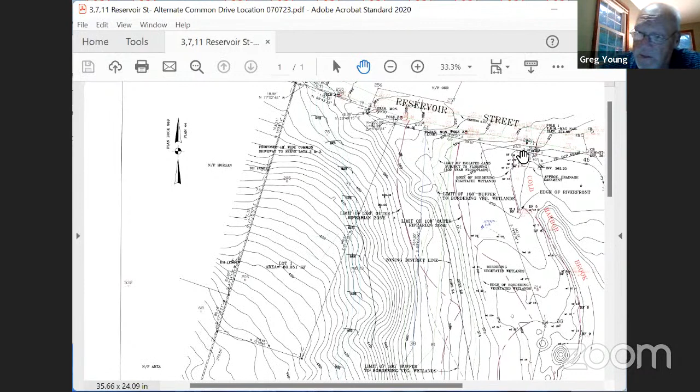Bob, I'm glad to hear you're reaching out. We've had some very positive, not surprisingly, outcomes when developers, engineers, and builders all reach out ahead of time to the abutters. All the problems get nipped in the bud, right? So that's a good process to start. All right, off to a good start.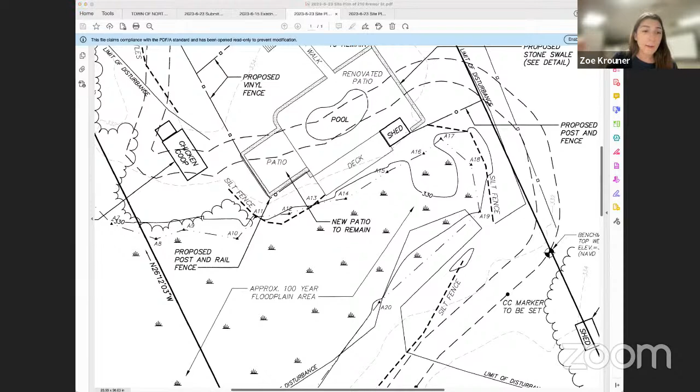So let's see here. Yeah, so in conclusion, and I actually do want to add one last thing. Thank you everyone for your time. Goddard does believe that these forms of mitigation are suitable to protect the wetlands under the Town of Northborough's wetlands bylaws.

The last thing I just want to request, unless there's any strong objections, is there's been piles of loam on the site for quite a while now. The applicant would like to lay that loam down, just between the house and the pool where there's exposed dirt, as mentioned in the notice of intent, all within lawn, and do some lawn seed, which I think would be really good, especially with all the rain we're getting, to stabilize that area. Thank you everyone so much for your time, and I'm happy to answer any questions that anyone may have.

Great, thank you Zoe, thanks for hanging in there tonight. It's been a long meeting, so. I'll—

Just get right to the point here. I have an issue with the patio. The more I think about it, the more I think it should come out. And that's basically because I don't like the precedent where we say, you know what, somebody did this and they just put a patio inside the 15-foot—oh, I'm sorry, but I won't do it next time.

I think there's an issue with the patio. I mean, move it to the other side. Vinny, you and I were talking earlier today, and I think you said that there was an order of conditions back from several years ago around the pool.

Yes, when the pool was permitted back in, I think it was 95 or 97, there was an order of conditions issued that said no alteration would go more than 15 feet beyond the pool. Yeah, so there's even a precedent there. So everything else sounds good in terms of removing brush piles, putting some plantings in, but I have an issue with the patio staying there.

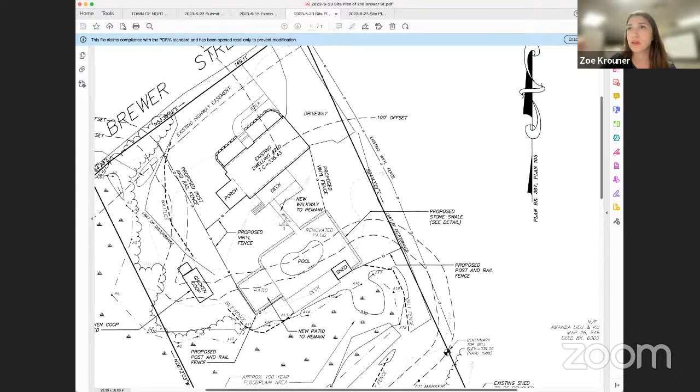Yeah, so would we want to hold off if he needs to access and remove the patio? I think he would just prefer to do it because he's been getting complaints from the neighbors about it looking bad, and he's been having some problems with lots of rain coming and all the exposed dirt not being able to stabilize. So I think being able to just have them spread the loam in just those areas and put the lawn seed might help stabilize the area a little bit, even if it gets a little bit messed up when they go to take the patio out.

I think Justin raises a good idea. Just when they go to take that patio out, that's a lot of work, and they're going to have some big machines. So they're not going to drive over their walkway. They're going to drive right along the west side of the house, I assume. But they have to watch out there because that's where the septic system is. So they're going to have to be careful.

I don't know that having loam out there, and at this time of year especially, I don't know that grass is going to be taking, though this year is totally different. Normally I wouldn't plant grass in August.

I mean, the concern here is, again, that we're maybe one hearing from an approval of an order of conditions, to get it recorded before we can actually start work and have a pre-construction meeting. Getting this loam spread and stabilized buys you 6 to 8 weeks of an area that's spread with loam and grass in the buffer zone. So it's the areas on both sides of that walkway, that's where the piles are sitting, just to level them out. So I think that's a plus to everything.

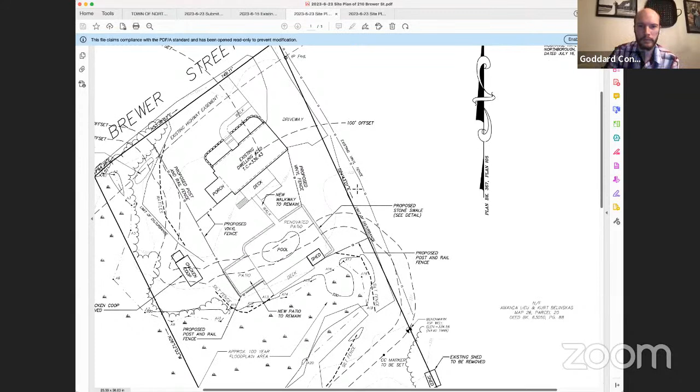If the commission's okay with it, I would go with a larger wattle, something bigger than the 6-inch, maybe 8, so you have enough since you're going to bury 2 inches. You want enough so you can store things, because that area off to the east side is where the slope goes down. There's a little channelized section, and if we get rains like we got the other day or earlier today, that loam material would be moving. Yeah, we can do 8 inches. Good.

Any questions, commission, concerns? Okay, then we are — Zoe, do you have more questions before we move on? No, Zoe? Thank you. No, thank you everyone for your time.

We need a motion to continue this to the August meeting. So moved. Is there a second? Second, by Todd Helwig. Roll call: Dan Clark, yes. Justin Dufresne, yes. Diane Gouldner, yes. Todd Helwig, yes. Is Tom with us still? I am, but I was not here for the whole thing, so I'll pass on this. Okay, thanks, Tom. And I vote yes. Vinny, you're muted.

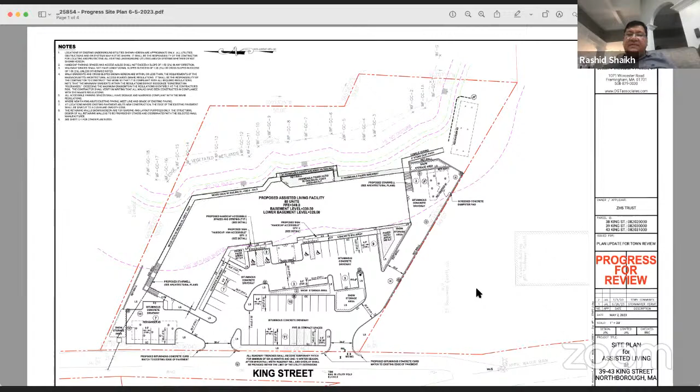Mark, you're breaking up, Mark, you're breaking up. Let me just say a couple of statements, Mark, and then you come in and explain it. Okay, yeah. So basically what we want to say is that when we went in a few months ago thinking of getting the construction permit, we realized that there's a new bylaw for stormwater and land disturbance. So we started following up on that, and I must appreciate Vince for giving us lots of insight.

Honestly, usually we just go and apply and then take the feedback. But since Vince and Fred and everybody else were really forthcoming with updates and information, we ended up making lots of changes back and forth. Now we believe we're almost close to the finish line, so this might save the board's time. It was really Mark's idea to go for an informal meeting and incorporate some of that feedback, hopefully so the next official meeting will be one and done. But without further ado, I'd like to have Mark go over and explain, and ask questions.

Good evening, Mark Arnold with Goddard Consulting. Just a quick recap: this is a project, an assisted living facility approved several years ago. It still has an active order of conditions for construction. As Rashid mentioned, we now need to apply under the stormwater bylaw, which requires abutter notification, legal notification, and public hearings before the commission, very similar to what you'd see for an order of conditions. It's just a separate set of regulations, though still focused on the key question of runoff and impacts to the wetland itself.

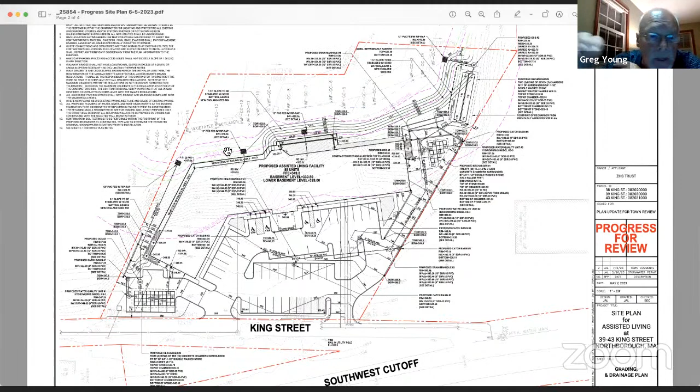Can you increase the size of that a little bit? I'll zoom in. So this back left-hand corner had grading all through the side slope, and in this back area the limit of work was along the 25-foot buffer when it was approved. The grading in the 25-foot has been significantly reduced there. So overall: no change to the limit of work, reduced grading, no structures or patios in the 25-foot. There is some riprap added to clarify what the original plan showed for the roof drains—the roof drains were shown in certain areas, and now the plans show riprap to address velocity. Those are the changes in the 25-foot buffer: no change to limit of work, reduced grading, and some additional stone at the stormwater overflow pipes. That's it for the 25-foot.

Going into the 35-foot buffer, we replaced some of the walking paths in the back—this is a gravel walking path and grass. The purpose of this access path around the whole back of the building is key to fire access. The fire department wants good access around this building. We've talked to them, and they're actually very happy with this change; they think it's better for them overall, behind the building.

On the left side, we've got a wooden deck with railing, again eliminating grading off the back of the building since the building now just becomes a wall—we don't have to grade or create a slope back there. In the back, we end up with a slightly wider two-stage patio. There's a retaining wall here that's outside the 35-foot, and then it's basically an at-grade walking patio around it. Again, in the 35-foot there have been some adjustments with the roof drains and stone. That's it for the 35-foot buffer—pretty minimal changes in that area.

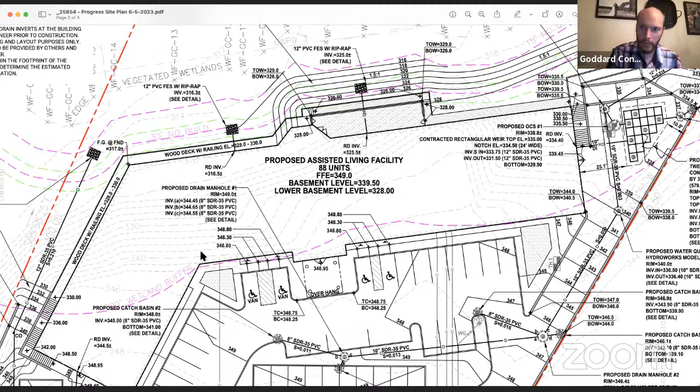So our hope is to let you know that, one, we're definitely going to file under your stormwater bylaw, and we're looking forward to being in front of you and hearing from the town engineer on that. And two, we'd like to get the commission's feedback on whether we really need to file an amended order of conditions to re-notify abutters again, to amend an order of conditions when these changes are fairly minor, and again, they're all going to be reviewed by the commission and notified to all abutters under your stormwater bylaw.

I'm sorry, can you hear me, Mr. Chair? Yes, certainly. I think Mark may have forgotten, there is on the left-hand side, Mark, if you can zoom out, there's also a stormwater system we added on the left-hand side as well. This was not there before. That's again to add more and to compensate for Atlas 14, and what have you.

So actually the benefit is that we're not taking water all the way on one side. It's kind of outside of the 100-foot buffer, I guess. Is this the reason, Mark, you didn't mention? Yeah, it is outside the buffer zone, but you are right, it actually balances the stormwater on site. Instead of having the stormwater all go to one side, this is actually splitting the stormwater evenly across the site, which I think is also better from a stormwater discharge situation.

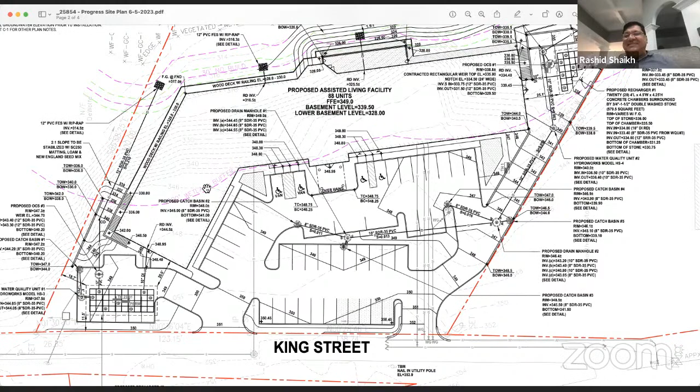I mean, it is more construction cost wise, but we believe with all the feedback we have gotten from the town engineer, and especially from Vince, and even the feedback we asked from the town planner and building commissioner, and we had meetings with the fire chief as well, we got a lot of positive feedback, and we believe that this is a better, more stable site in the long run.

And as you remember, in the original order of conditions, we did have a septic system in the front, which in the last meeting I updated you that we are taking away. And now it will be a town sewer. That was in the last meeting, we discussed that already.

So Rashid, the building itself, there's no change to the structure location. Zero. It's all around the outside and the back piece, as Mark explained, and all that. Yes, sir. Okay, and what about planning or ZBA if they apply? You have to go back in front of them?

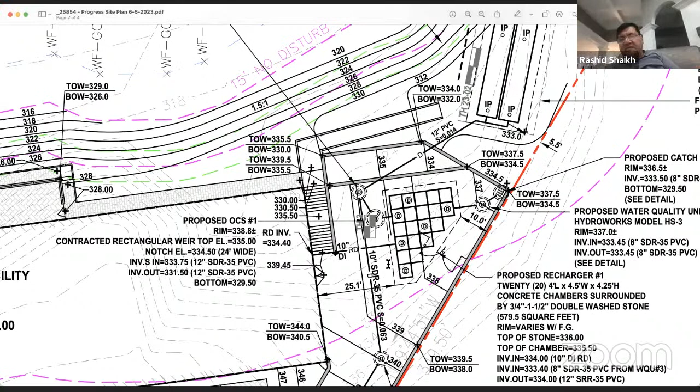Let's go back. Yeah, so there's a steep slope here, but it's also kind of a kitty corner angle, so there's a slope this direction. We're trying to flatten it out so we can actually get vehicles down to this corner.

One other reason we did this is to basically create more snow storage space as well, and this whole thing for grading also makes a lot of sense.

Do you want to go on the left side, Mark? Yeah, we didn't do anything. There's a wall here just to pick up some grading. It was there before, I think it might have been there too.

It just goes into the buffer zone just a little bit. I think that's just again to tighten up grading versus anything else. The backside is what, riprap down the slope, or

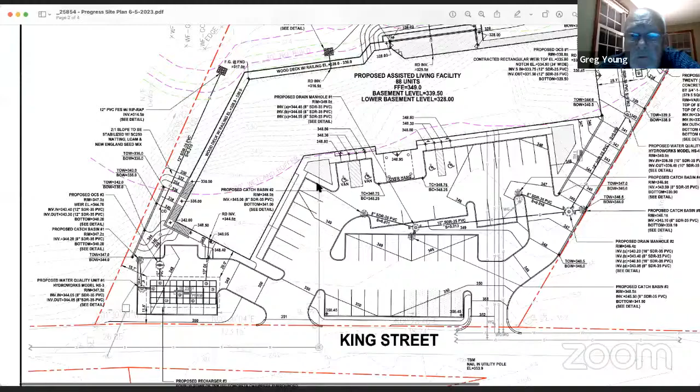these slopes back here, you mean? Yes. I believe they were to be vegetated. Vegetation's okay.

So we've heard your comments earlier tonight about erosion control mats. So we'll make sure that we look into those notes to make sure that's there. And I think that's already in the order of conditions, the erosion control mats. There was a lot of discussion in the original order, I remember, and that's already in.

There we go. Or comments from the commission? Vinny, what's your thought on this one?

I think it's an improvement, an overall improvement. I don't know if there are significant changes relative to the wetlands. They're not getting any closer to the wetlands.

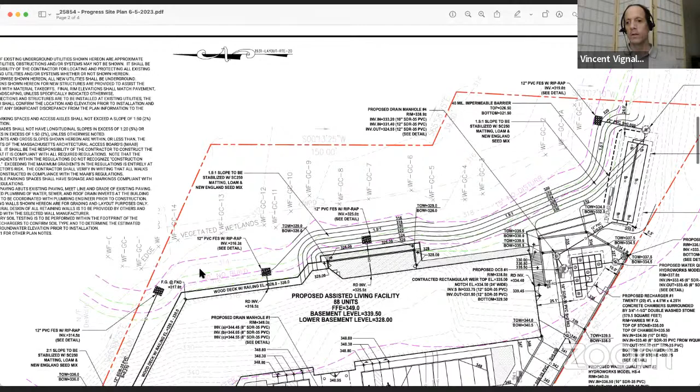The area over to the, I guess it's the northeast. I can't move your picture. Yeah, to the left side of the drawing, they're not doing any of the grading that they had proposed. So that's a big improvement.

The point that Justin made is great about not having a discharge on a steep slope. 1.5 to 1 might be a little tight or a little steep for a regular jute net mat, and you may need to go to something stronger. I don't know what you normally use, but North American Green has a calculator that they use. Just submit enough information to show that wherever it's going to discharge, it's going to be stable.

But generally, I think it's something that we can address as construction changes. So when they do their as-built, they put all this information on the plan, so we could approve it as constructed versus as originally designed.

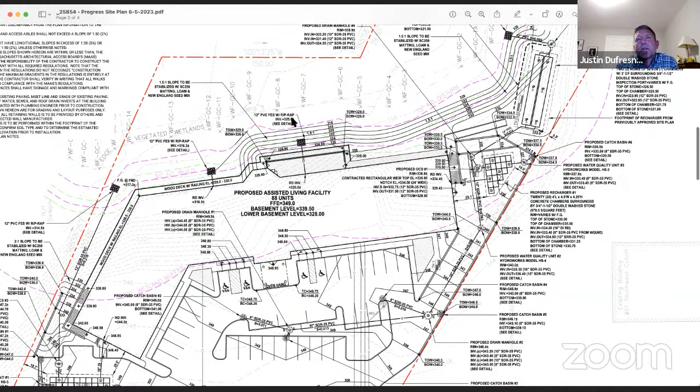And Vinny, I think if I remember correctly, we did get into a lot of discussion about the slope back there, and I think they specified, it maybe even says it up there, SC 250 matting. And I remember us having kind of a conversation around that particular erosion control, and that it was allowed for up to 1.5 to 1 slopes, and they submitted a bunch of documentation and stuff on that.

I think we kind of hammered that home, because I remember us going back and forth as to riprap, or could we do it with this matting, and the engineer at the time really got pretty detailed on that. Yeah, the 250 is great, that'll go to a 1-to-1. I think that's what we're using, and we were talking about 1-to-1 at that time. There was lots and lots of discussion, we actually had a couple of meetings on that, back and forth. So I think it's part of the order.

I'm actually looking at the old plans that were approved, and I don't see a mat detail on it. But we can definitely do it in the as-built.

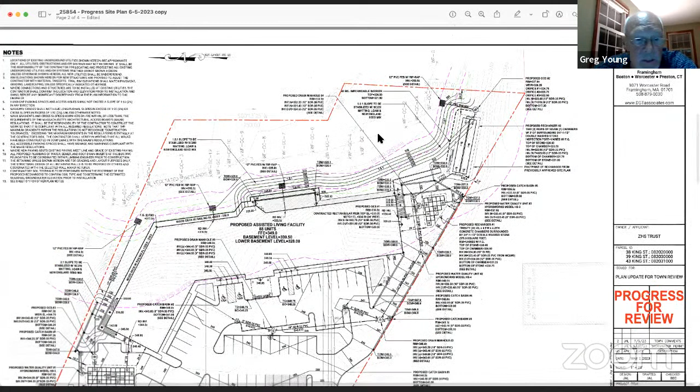Okay, anything else? So is the consensus with the commission that we do not need an amended order of conditions? We can deal with the changes through other existing channels? I'd say so, yeah, I'd be okay with that. Same.

Thank you so much. So our plan is to submit that minor field change request along with our stormwater permit, so that it'll happen at the same hearing and follows everything nicely and concisely for everyone. That way, if the public want to make comments when they're notified for the stormwater bylaw, they can also comment on any minor field change notes under the order. That way it's nice and concise and everything's on the table. Great, thank you, Mark, I agree.

Rashid, what was the final outcome for access around King Street and Route 20? What's going to happen there? We are going through 38 King Street, and we gave easement to the town through 38 King Street. Actually, that's the reason it took very, very long time to go through Mass DOT and get that approved. You're going to go right across, blow right through that section there. That's correct.

All right, good, just curious. Very good, thank you. Oh yeah, actually the town has easement on 38 King Street for that reason. Thank you, Rashid, we'll see you again in a month or so. Yeah, we definitely want to kind of close this. Looking forward to closing it. Okay, all right, great, thanks a lot, Mark, thank you, have a good night. Yeah, good night, thank you. Yep, bye, all right.